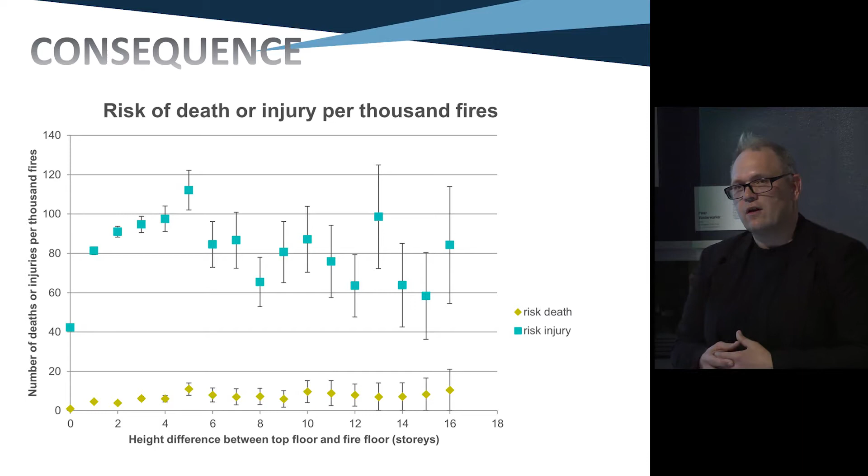We have phased evacuation, where it takes a bit more time to evacuate the building. When we get to the really tall buildings, you might actually stay in there for the entirety of the fire situation. When we think about the really big threat of tall buildings and we think about fire, we tend to think about structural collapse. So understanding the consequences of structural fire failure is really, really important in tall buildings.

But, you know, we don't tend to worry about threats in tall buildings, perhaps because we have building codes. And building codes tell us the building's going to be safe, don't they? We design to the code, the building will be safe. That's a bit of a presumption, I think.

There's a few problems with building codes, particularly when it comes to modern tall buildings and the really big super tall stuff. For a start, building codes tend to be a little bit obsessed with your occupancy type - they like to narrow things down. It's a bit like the record store trying to make you think you're a country fan or a rock fan when you like both. Tall buildings tend to be mixed use, and building codes are really bad at handling mixed use.

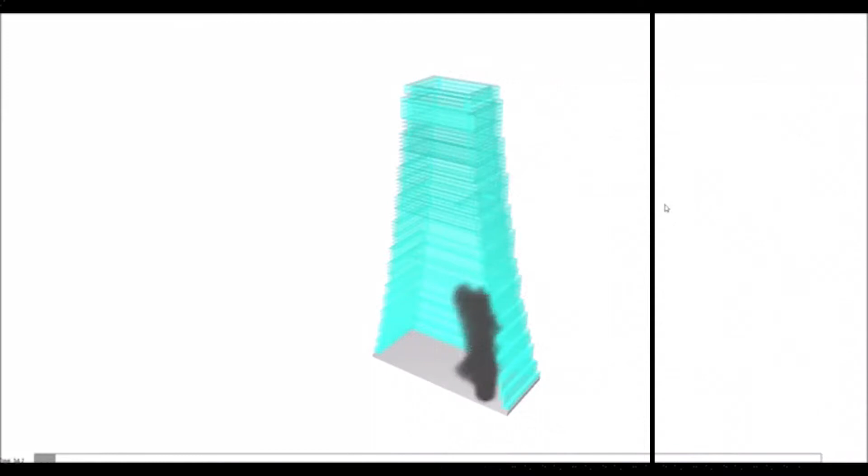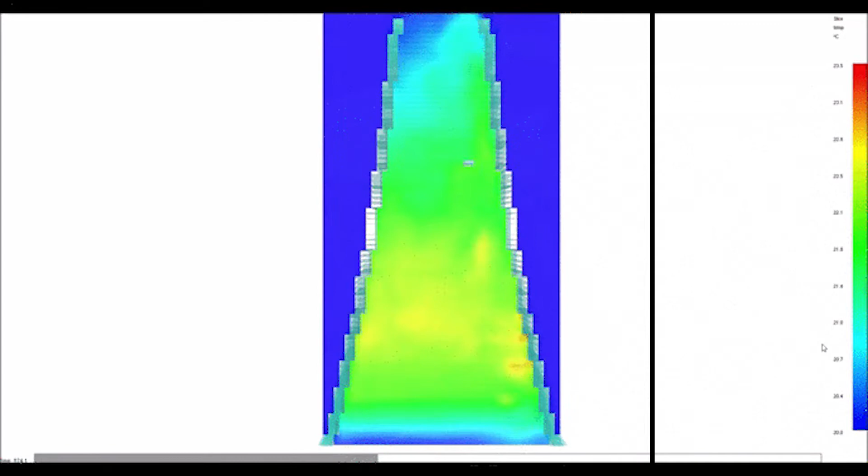Now we have ways of dealing with these hazards and understanding and modelling them. In tall atria, for example, we do a lot of smoke modelling, which is a very valuable tool for us. We can do that, so we can understand how the fire and the smoke spreads around the building.

We can also look at things like evacuation. This is a model of an evacuation for a building in Mumbai, trying to understand how lift evacuation, elevator evacuation, improves the evacuation times and reduces the consequences of the fire arising.

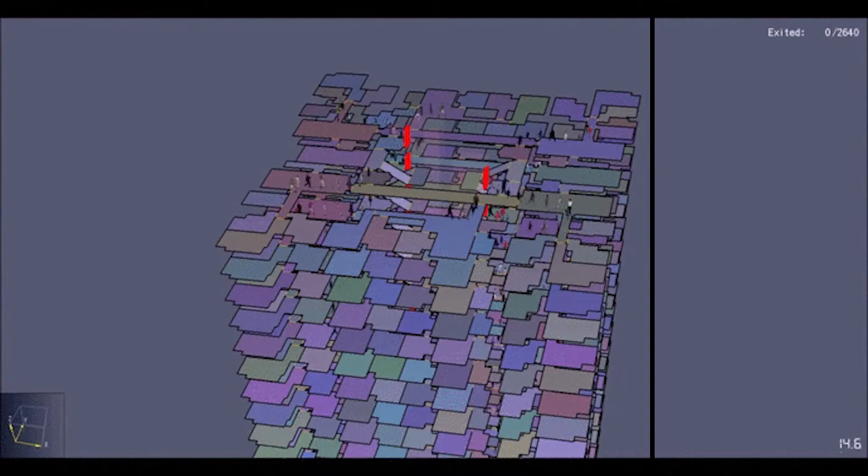And we put all that stuff together. We do have tools that allow us to work out what the risk in buildings is. We've got all the basic tools.

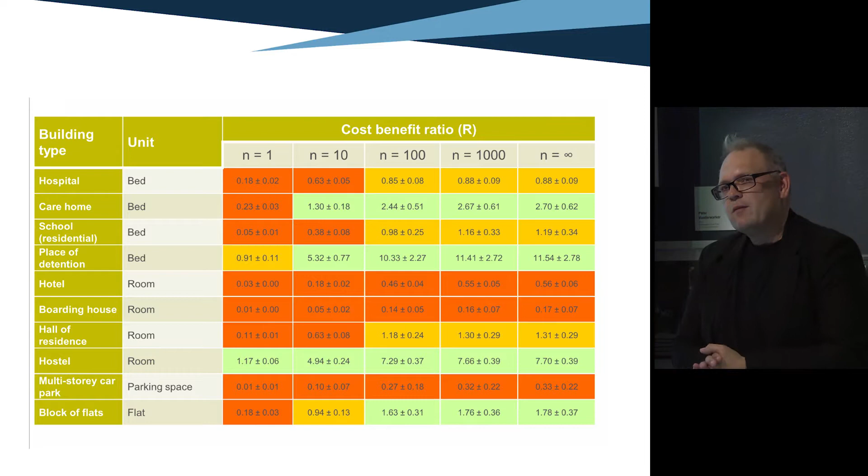This is a study by the Building Research Establishment in the UK to understand whether putting sprinklers in a building is a good idea or not, which might sound insane to people from America who put sprinklers in pretty much everything, but in the UK we still don't sprinkler things like high-rise hotels. We don't have to sprinkler anything really apart from high-rise offices and the like.

The problem with using computational modelling and using analyses to answer questions is you put the wrong data in, you get the wrong answers out. And potentially you're no better off than using a building code. We've just criticised building codes for not necessarily looking at the right building type. Same thing happens with analyses. Luckily, there's ways around that as well.

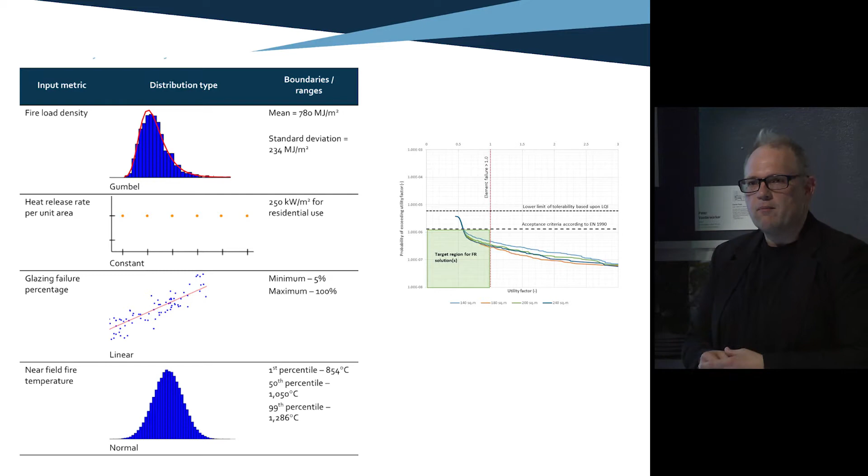So this is very much state of the art in fire engineering now. We started to use probabilistic methods. We don't assume one particular fire. We can assume every fire that might occur in a building under every different design condition. This is from a project in Mumbai where we looked at every different apartment permutation, all this sort of stuff as well. So we can do that.

So as I said before, the biggest threat to skyscrapers is believing that codes deliver safety. Trusting in the codes, clinging to them like a child learning to swim clings to a float in the pool. That's a really dangerous thing to do with skyscrapers.

But if you move to a performance-based approach, where you're going to prove safety and you think through all the possible permutations and the legacy of the building, then actually that becomes an opportunity for tall buildings. It unlocks tall buildings, it unlocks future potential. So you turn fire safety from a risk, actually, potentially, into an opportunity. Thank you.

What do we see is the biggest threat to skyscrapers? As a structural engineer, I find these projects fascinating, but the reality is that the location, views, and people's willingness to pay for them, that's why these projects happen. So at least my answer to Anthony's philosophical question, what's the biggest threat, and frankly the opportunity, it's economics.

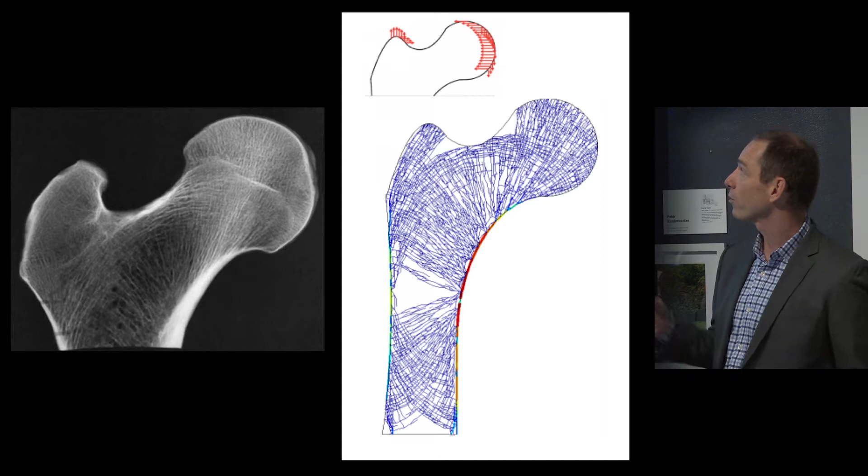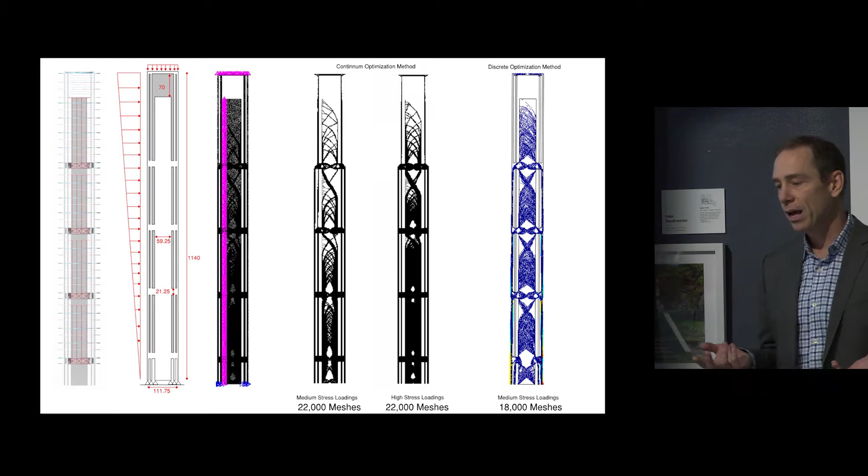But supply and demand has two different sides to that equation. So as a structural engineer, I control the supply, what goes into the building, but not the demands. And that kind of keys a little bit off of what Simon was just talking about.

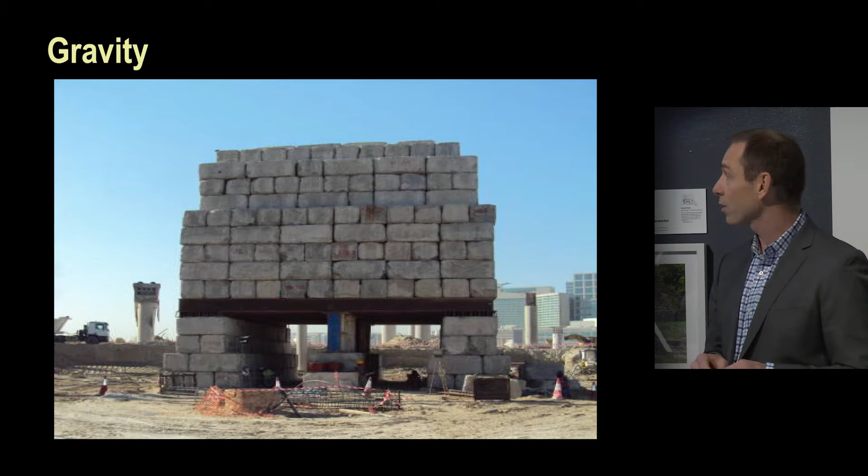For one, let's start with what's maybe the easiest one, gravity. Fortunately, gravity is the same thing worldwide, and building codes do follow a very similar model on that. So as a structural engineer that works around the globe, my job gets a little easier that we're all talking about the same thing. But gravity, while the math may seem easy, it's actually one of the hardest building challenges to deal with. The math of life safety of gravity is straightforward, but movement with time, creep, shrinkage, foundation settlement, that's actually not so easy. And in fact, what seems like one of the easiest topics to deal with is probably one of the costliest that we have to deal with, at least in my realm as a structural engineer.

So this is maybe a little bit in Simon's world. When we talk about blast and fire, our challenge here is really limiting the size of the hazard and where the hazard happens. If you can define the hazard, we can probably do a pretty good job in an engineering profession as a way to resist that hazard.

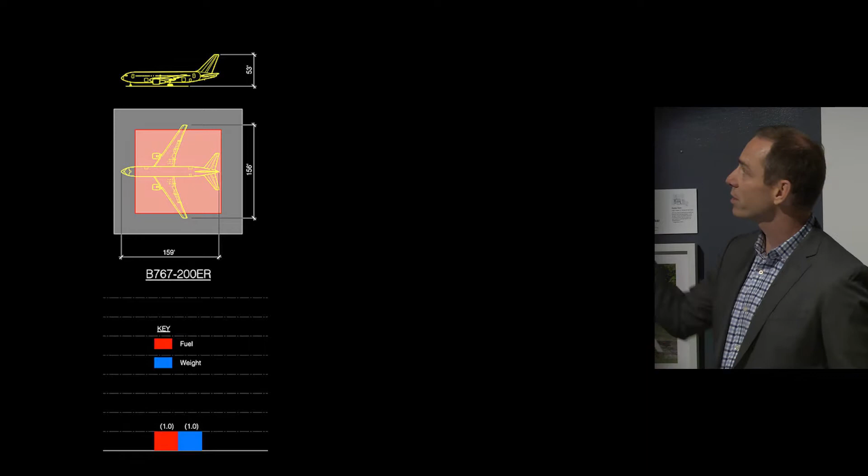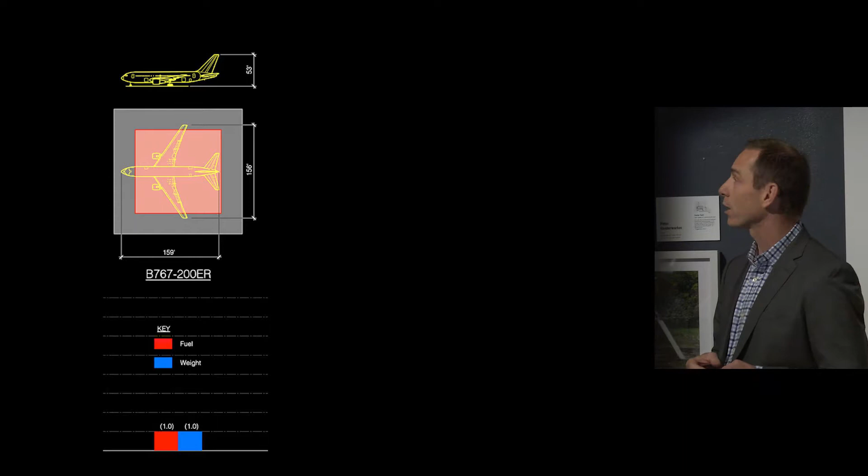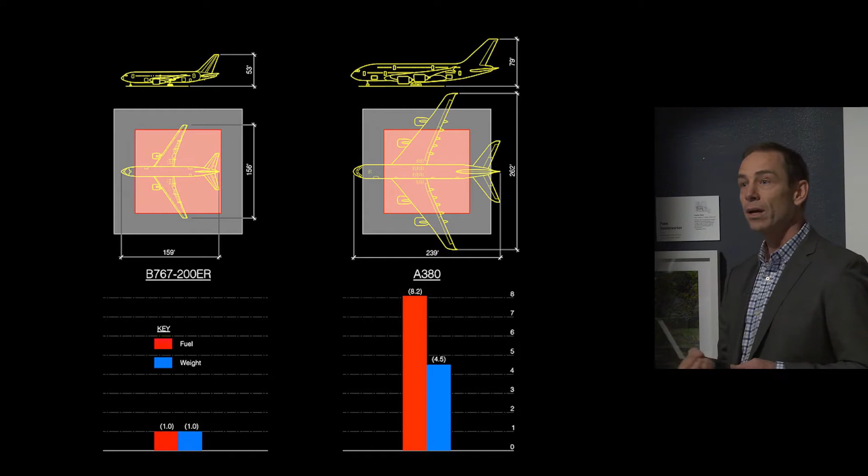We can, in fact, there are other ways that we deal with this hazard. But when we do talk about blast, for what size hazard and at what location, maybe for the things that are harder to control at the base of a building. And frankly, all buildings, especially the tall buildings, aren't designed to the same thing.

Nicole will probably hit on this a little more. Seismic. I'm a West Coast engineer. I do a lot of seismic design. Generally, if on a well-conceived building, we get the building frames pretty well, and we're doing a pretty good job at that. What we really don't do as well on is the infill systems, cladding systems that aren't appropriately jointed.

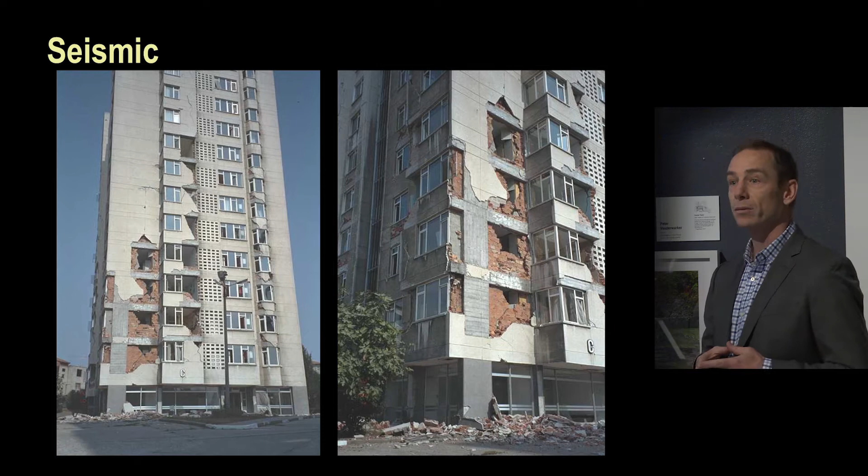And I actually think the idea of the falling hazard coming off of the building, and especially in developing markets, or unfortunately in markets even in the US that aren't in the high seismic zones of the West Coast, I think this is one of the really big hazards that needs more attention. You know, brick, I love actually brick buildings, but that brick facade on the outside in many countries needs to be very careful in seismic.

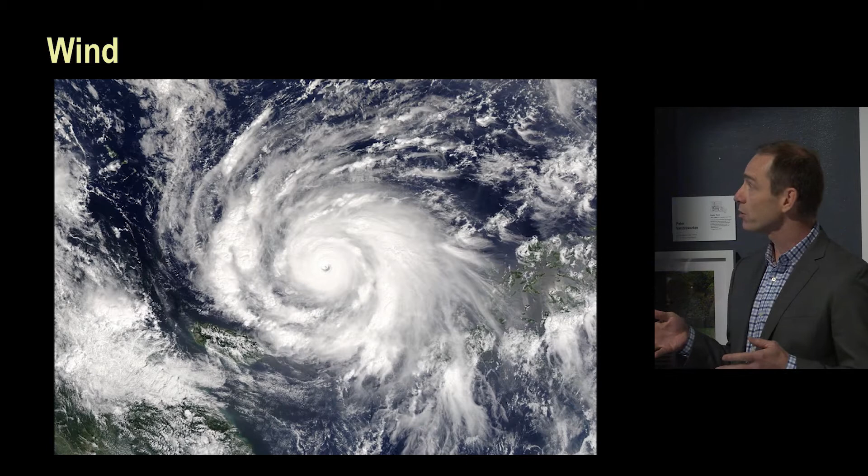Wind, I happen to believe in climate change. And you know what, our wind storms are getting bigger as a hazard to our building. This is only an increasing event that we need to deal with. Bluntly speaking, I think we do a pretty good job on our buildings for life safety. Our buildings generally aren't going to fall over.

We look at 700 and 1700-year windstorms. But facade cladding damage and the resulting water and mold and the economics to try to repair that can do a building in very quickly. So I think wind definitely is a topic that plays a lot into what we do with tall building design, but I think that the hazard is there.

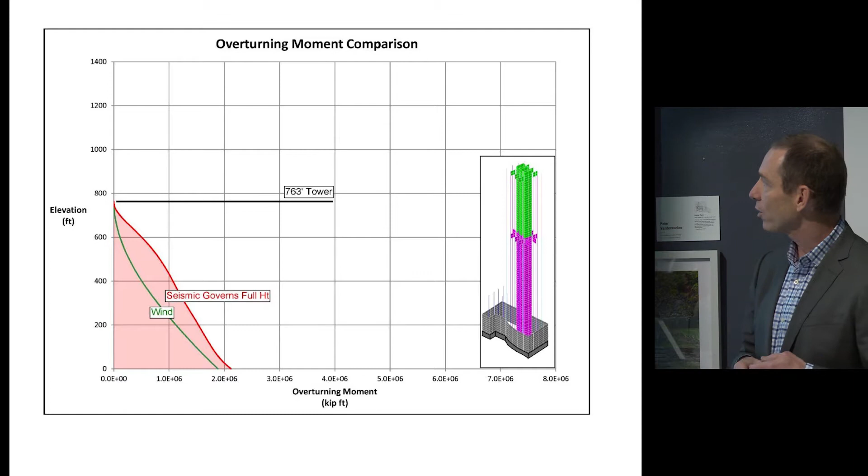So a question I'm always asked, you know, which is worse, wind or seismic? Of course it depends on location, but here's a case study of a tower on the West Coast in a high seismic, moderate wind environment, where for this site and tower at 750 feet, the wind and seismic were pretty close. This graph has on the elevation is feet, overturning moment on the bottom.

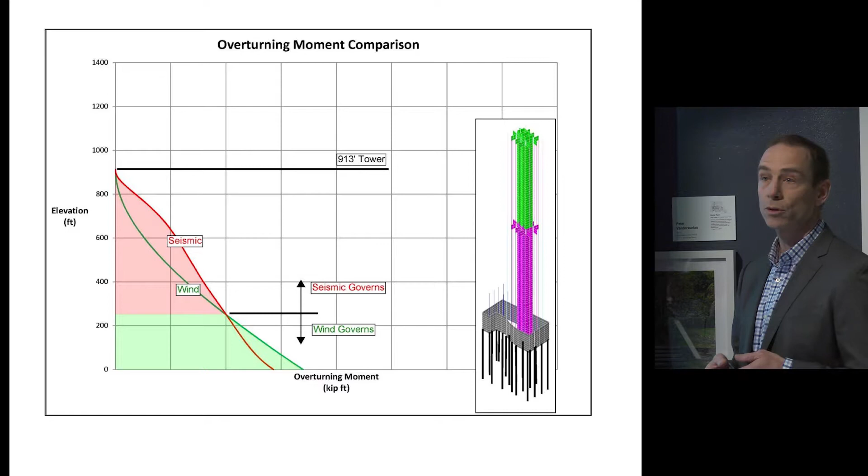That same building extruded to 900 feet, wind starts to control at the base of the building. But seismic, due to higher mode effects and the frequency differences of how these behave, actually still controls about 2/3 of the building height. And then if we take that another step farther, up to 1,200 feet, wind is driving the design for sure at the base. But again, because of higher mode vibration effects, seismic is still showing itself in the building. So it really depends on where you are in the building.

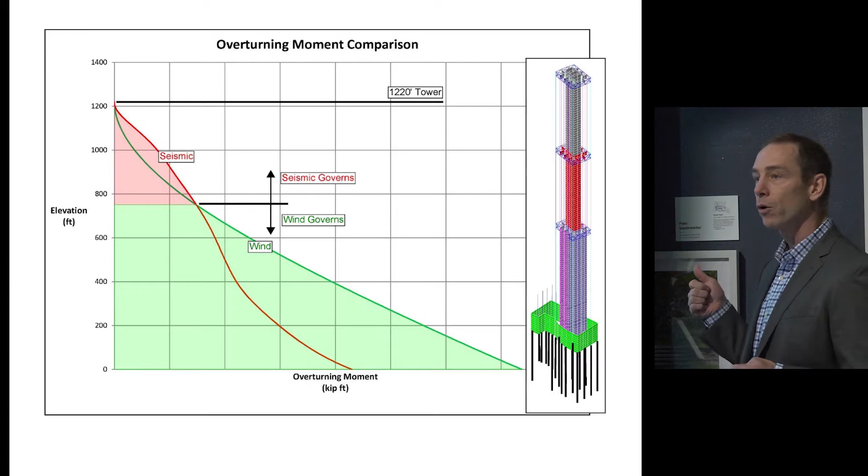But again, when you start talking about really tall, slender buildings, the taller we go, this is all looking at life safety. So this is 500+ year events for wind and earthquake.

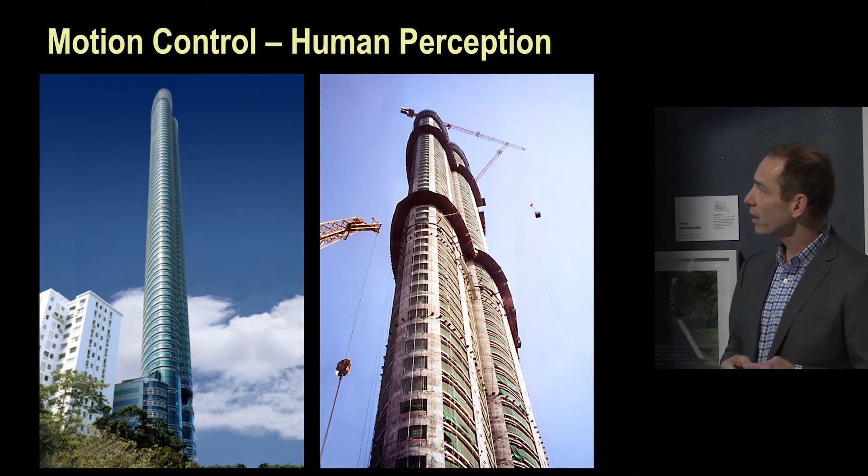Motion control, and actually looking at the wind, at human perception of motion at the 1-year and the 10-year events, the events you're going to frequently see in the building, that starts to control the proportioning of what we put into our buildings. So in a case like this, the size of the core, the size of the concrete is probably stiffness controlled by human perception of motion.

The steel inside of it is going to be life safety controlled. So what other ways do we do that? Typically in our buildings, we're going to proportion mass and stiffness for that human perception of motion.

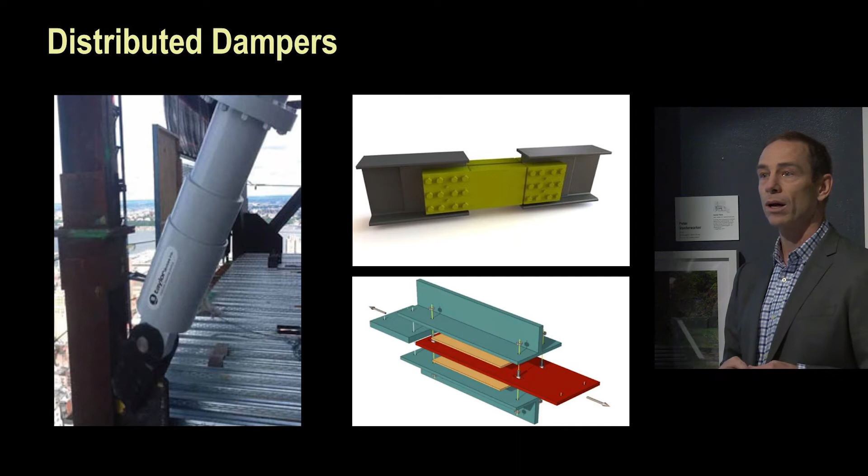The other great strategy is damping systems, and that can be viscoelastic or hydraulic, as some of these systems I'm showing right here that might be more distributed in a building. Or another thing that happens a lot are tuned mass systems that happen up on the roof. So whether it's a water tank or other structures that we can put up there, we can tune the harmonics to settle that. Now, there's still debate on the reliability of these systems for always being there. So in many cases, these systems end up going in for, well, they're there for perception, but not life safety.

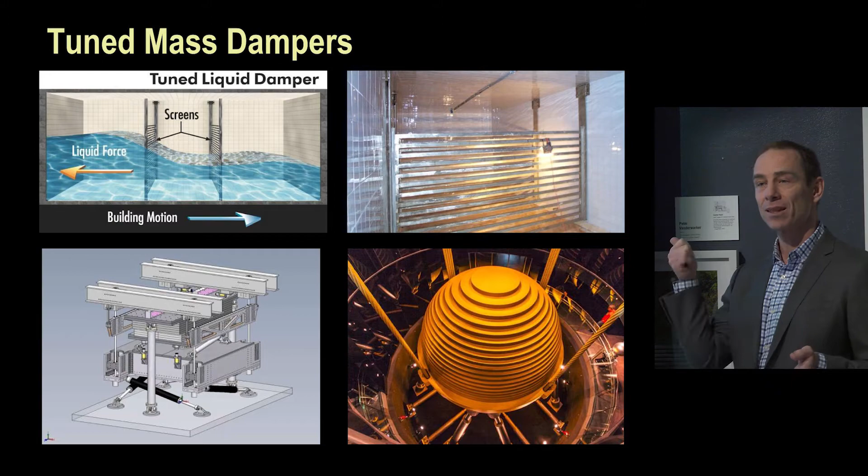Bottom line for me, it's economics, because I think most of the issues I've shown there, we can manage the hazard of. With that, I'll turn it over to Hope.

The events of September 11 forever changed the way we design tall buildings in regard to an approach on security and life safety. The design of Tower 1 at the World Trade Center site incorporated advanced life safety systems which exceeded the existing building codes at that time.

In 2005, to address security concerns, the building was relocated within the original design of the master plan, away from the public street. This allowed for a public plaza on the west side of the building.

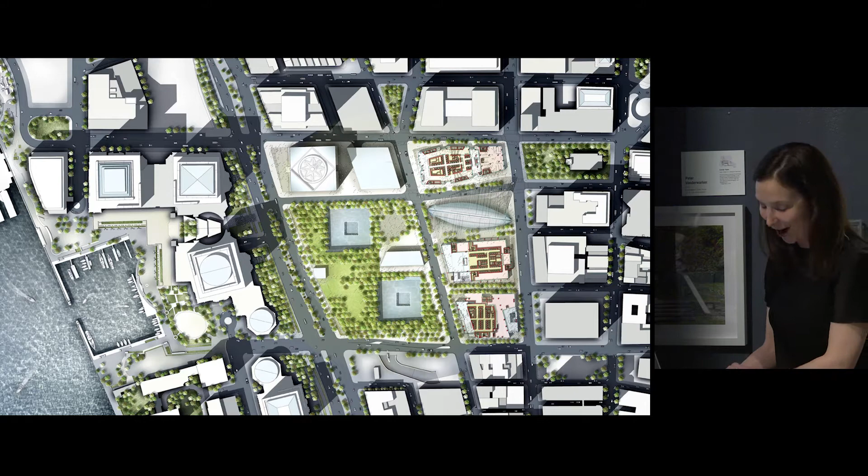This slide here actually should have been second, it's a photo of the master plan. What you're seeing here on the south side is the Vehicular Security Center, and that is basically the key place where all of the trucks and buses that service the underground are reviewed.

7 World Trade Center was the first commercial office building completed in New York City following the events of 9/11. There are many security considerations that were incorporated into the design of this building.

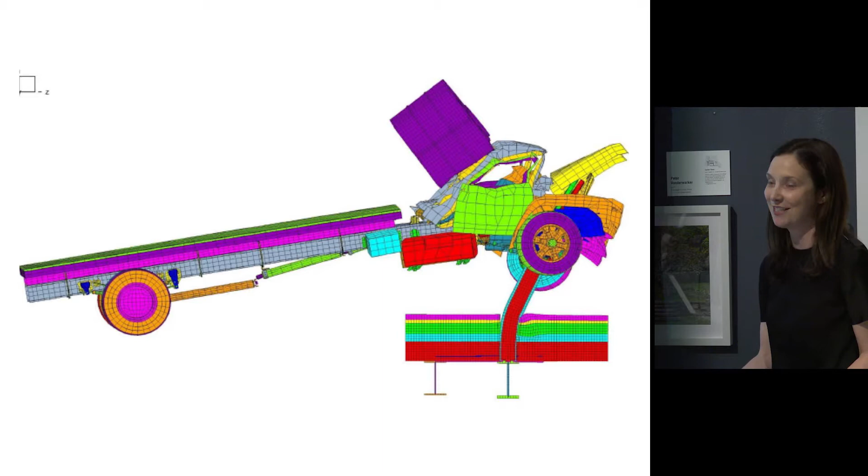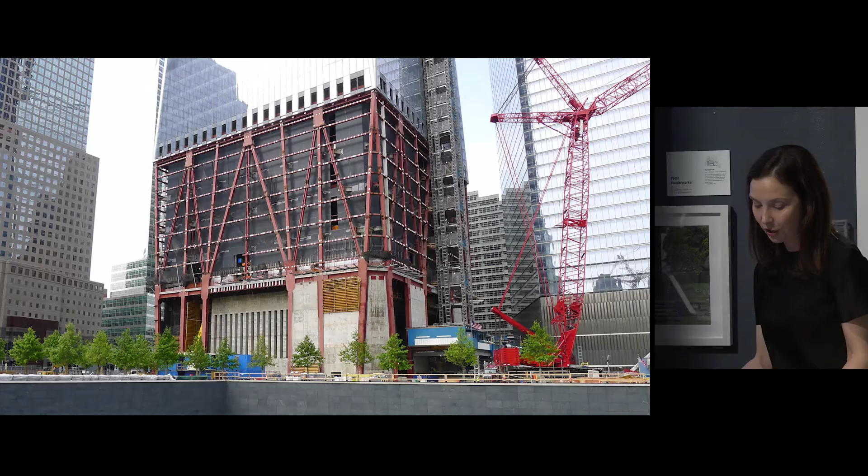At the World Trade Center site, bollards are an integral part of creating the comprehensive secured perimeter for the World Trade Center campus. Don't let what you see at the surface fool you. These 30-inch tall objects, spaced 4 feet on center, are designed to absorb significant impact. Beneath the sidewalk, hidden from the public eye, are robust structures comprised of steel and concrete. Bollards are one of the main security elements that have become part of our standard security protocol for tall buildings.

From the site, let me bring you in closer to the building. The structural robustness that you see, otherwise known as hardening, governs the entire base of the building. The first 50 feet of the tower is wrapped with 30-inch thick concrete walls located between each of the tower's perimeter structural steel columns. Sitting directly above the lobby is the low-rise mechanical plant, servicing the 500,000 square feet of below-grade property and lobby.

A unitized rain screen allowed for the elimination of conventional mechanical louvers at the face of the building. This was an aesthetic decision, but also a security consideration, as it disguised locations of the intakes for the life safety systems. The variation that you see in the facade also served a dual purpose.

First, a design consideration, and second, the variation allows for sufficient air movement for mechanical systems.

During the design of the podium wall, a physical life-size mock-up was constructed as proof of concept, as well as an opportunity for us to test out the lighting effect. The use of lighting was an important design feature. There's only 60 linear feet of vision glass in the lobby, so in the absence of having an evening lit lobby, the exterior lighting provides stimulation at dusk for pedestrians at grade.

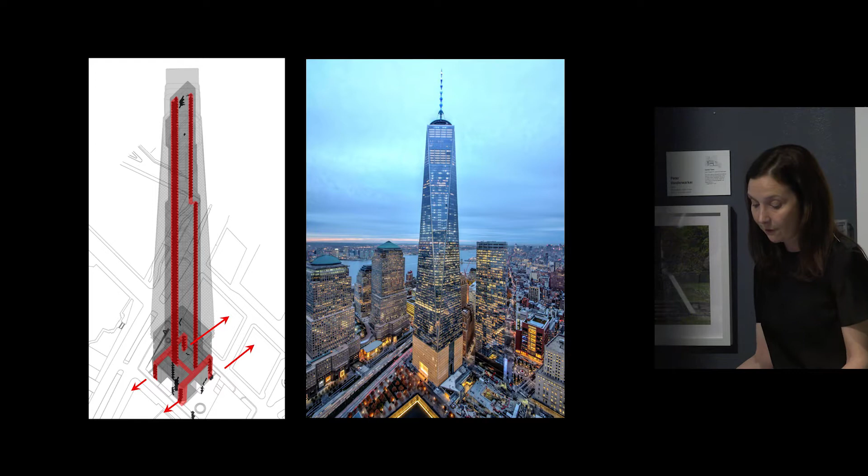To assure optimum egress and firefighting capacity, extra wide egress stairs were provided, allowing for two-way traffic. Above the lobby, the two tower stairs connect to the podium corners, allowing for direct egress to grade. Some of the other enhancements to the project strategy included stair pressurization, photoluminescent markings, and battery backup exit stair lighting.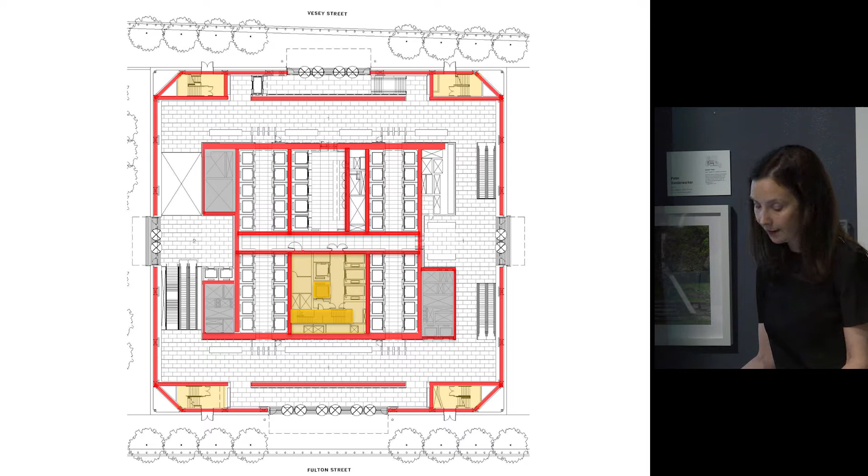In addition, the project incorporates a fully protected service core. You can refer to the orange box in the middle of the center at the bottom. A dedicated fireman's stair that does not contribute to egress capacity, along with a dedicated elevator for fireman use, was provided.

We're currently standing in the lobby on the ground floor at the core of the building, while the core of the building is under construction. 24-inch thick concrete floors protecting the below grade, cast-in-place walls ranging in thicknesses up to 4 feet, and strengths of concrete walls for the core up to 14,000 psi.

One of the main design challenges for this project: how do you design a lobby in the absence of any views to the outside? The security guidelines for the building allowed for only a minimal amount of glass to be used. Therefore, the only natural light is through apertures in the north and south baffled walls located 17 feet above grade. To emulate the feeling of natural light, the interior perimeter walls incorporated 30-foot tall artificial light coves. The design intent was to mimic the natural light slots in the baffled walls. You can start to see them along the perimeter right above this art in the back.

So on October 29, 2012, Superstorm Sandy took the East Coast by surprise. Like most people, I was glued to the TV as a single image of the World Trade Center aired that evening. Water was pouring in. If you're not aware, the existing World Trade Center site includes a bathtub slurry wall which was designed to hold back the water of the Hudson River. By the time Sandy passed over Lower Manhattan, soiled water had filled 3+ levels of the below grade at Tower 1. Once the water got in the bathtub, there was no way for it to get out. With no power in Lower Manhattan, it was days before industrial pumps could get to the site. Only after months of damage assessment could the demolition and subsequent rebuilding begin.

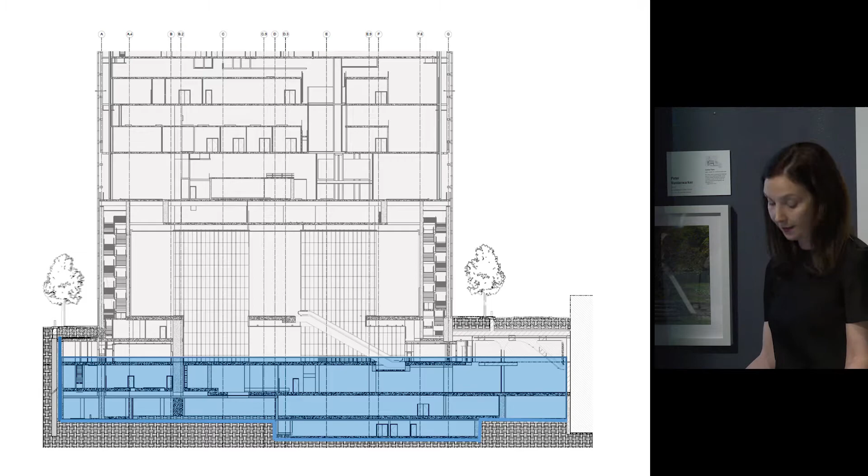So September 11th and Hurricane Sandy have altered the way we design buildings in regard to security, life safety, and resiliency. From the beginning of the design at World Trade Center, it was important to create an environment that speaks of remembrance while maintaining safety. Architects and engineers need to look at the challenges of today as design opportunities and invent ways to create great civic spaces that are secure, safe, and resilient.

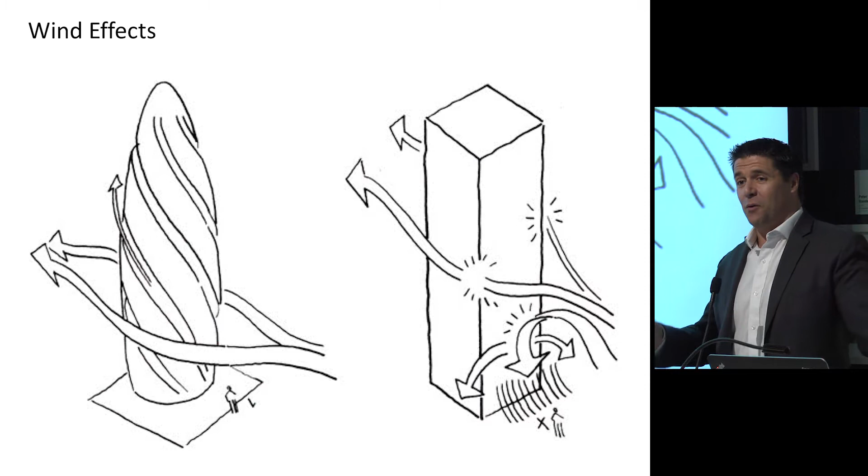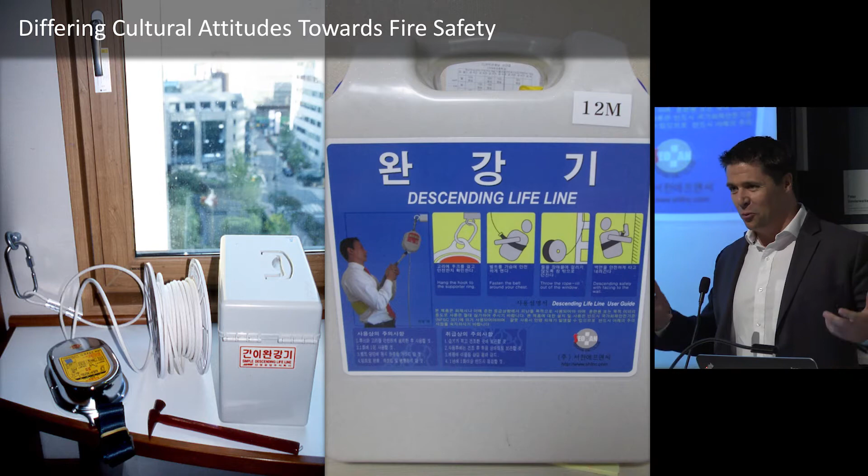You know, the modern high-rise building can often be the safest place to be inside during an earthquake. Fire, Simon talked a lot about fire. The thing I wanted to bring up with fire is there is no consistency around the world. I was in Korea a short while ago and was most intrigued to see a little box strapped to the wall in my hotel room. And I opened this little box and found this abseil belt and brake hammer in event of fire and thought, are you serious? In the event of a fire, you really expect me to rappel down the back of the building?

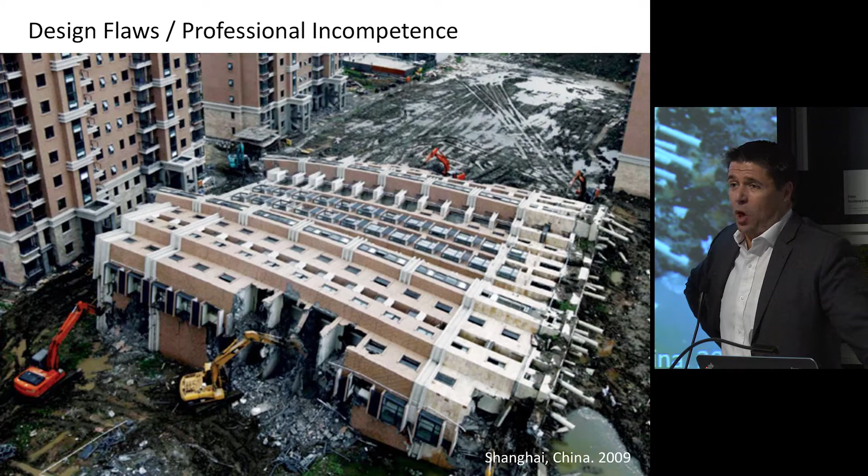Now, of course, not amongst our illustrious panel here, but professional incompetence. This was a project in China where the pile caps were not connected and they dug a big hole behind the tower and the tower fell over. I feel sorry for the people who live in the identical towers all around it, looking at this collapsed tower, thinking what could happen to our tower.

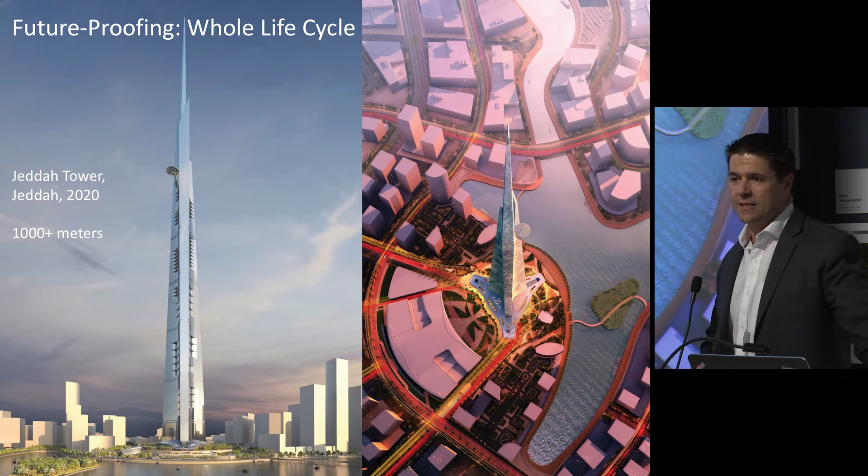One of the key things that I'm interested in is how long should we design these buildings for? What is the life cycle of these buildings? Because here's a staggering fact. I was here last week in Jeddah, and they're building a kilometer-high tower in the deserts of Saudi Arabia. We have never dismantled a building higher than 186 meters, other than World Trade Center, which obviously doesn't count. So we're building these buildings, and we have no idea how we're going to take them down. And by the way, it was in 1968 that we dismantled that tower.

Terrorism has already been touched on, and of course will be touched on some more this evening. But one of the questions I would ask is really, can you counter terrorism in a single building? I think people have already alluded to it tonight. The solutions to terrorism are at a much bigger political, social level, because what concerns me is they're always gonna find a way to attack if that intent to attack is there. And if it isn't at the building scale, then it's going to be at the urban scale. And we're seeing that. How can you counteract people who are willing to blow themselves up to harm other people?

And one of the things that concerns me is that now the boundaries between what's happening in politics and social and inequality, and we're seeing this civic unrest in cities all around the world that so easily spills over into violence. Pollution. I don't know how many days out of the year people in many Chinese cities get clean air, but it's not as many as it should be. Often the pollution rate is in the order of 5-6 times higher than the safest level. This is a huge threat to our cities and buildings.

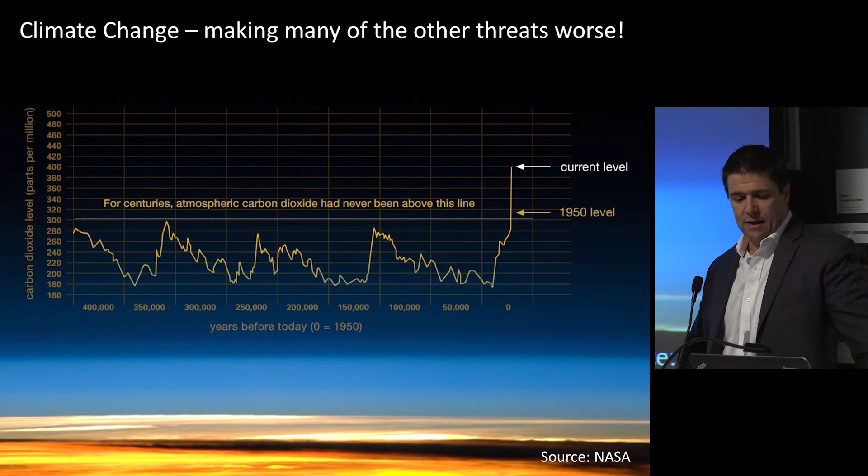But here's the key thing that I want to say, presuming you believe in climate change, of course, is that climate change is making all this worse. That's the problem. It's like a cycle that's getting worse. So we can talk about wind and the effect of wind, but actually what we're seeing is the large-scale occurrence of hurricanes. That means more of them, more frequently, in more of what used to be times of the year that they weren't occurring, in many cities of the world. So it's almost like every day now we're seeing these huge, large-scale natural disasters which are not necessarily natural.